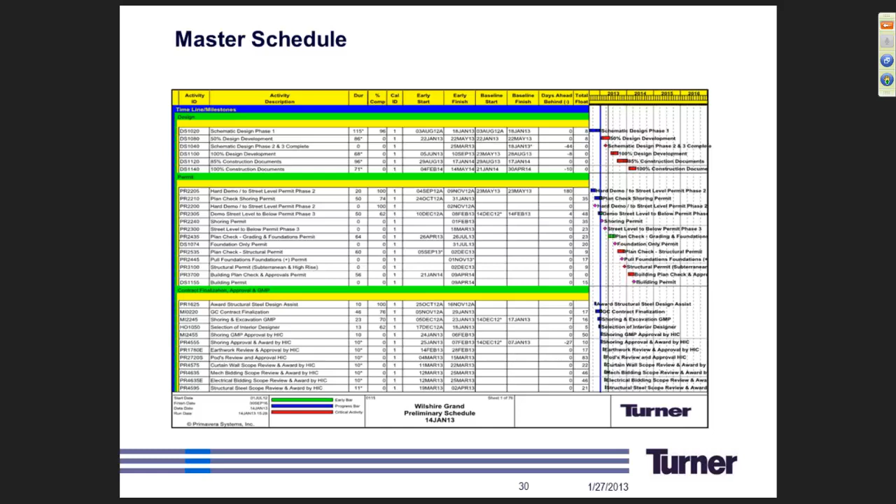So again, we start with our Gantt chart schedule, and the owner's requirement is to provide a CPM schedule. So we start with that schedule, but the next step we did, going back to our process, is to have a meeting and create a content plan. So just by what we learned on the San Diego Central Library project, we started applying it on this project right away. And instead of having just someone build a model and someone link a schedule and then have questions later, we start with the questions first, so that the outcome is the right outcome the first time around.

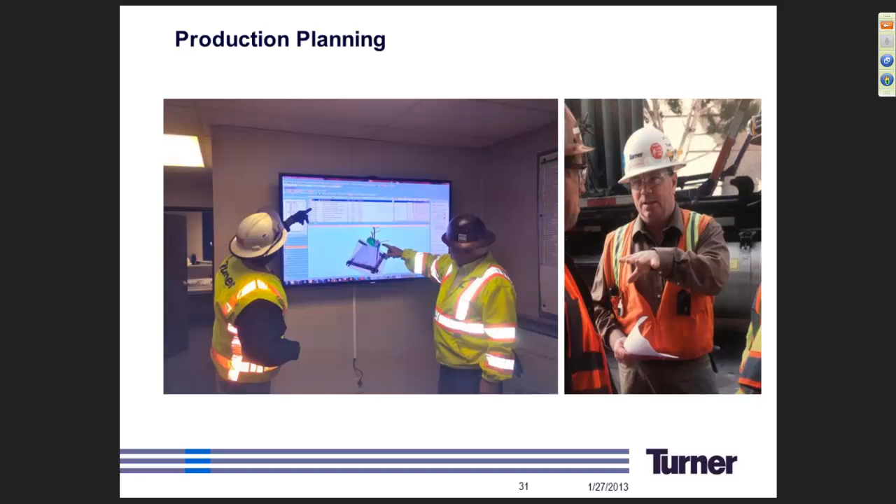And so you can see our superintendents again, Kim Long, Michael Martisano. These are the guys who are going to build this tower. So they have already figured out how they're going to build it. It's in their head. The challenge is how are we getting that information out to the masses so that everybody understands what's in Michael's head and how he envisions this tower to be built.

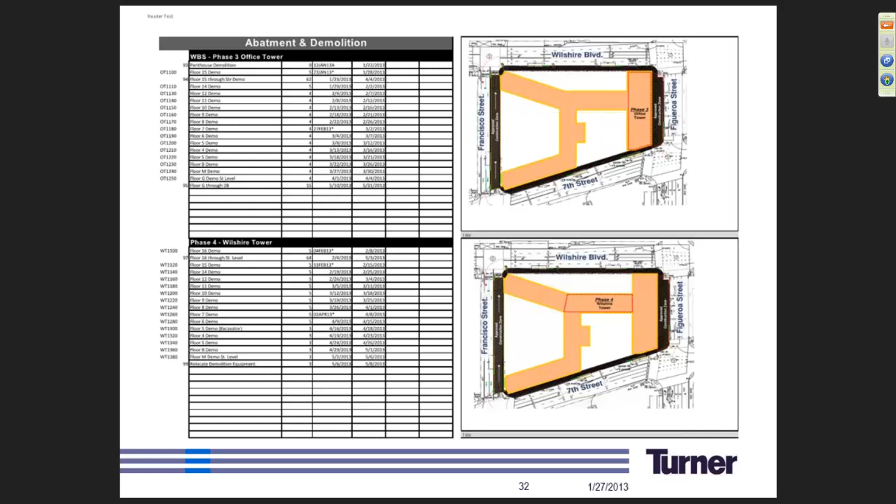So again, this is the content plan that we created. And we took basically the Gantt chart, exported into Excel. I know it's not very sophisticated, but it generated a discussion between the superintendent, our engineer, and the scheduling manager who was creating the schedule about the locations and about understanding which activities are linked to what locations, when those activities actually will happen. And we found a bunch of things in the schedule right away, even before we linked everything up, that helped us clarify the scope, helped us clarify what's going to happen when, where, just by having this conversation using this tool.

After we went through this process, then we started linking the schedule to the model. There's an existing building on site. This is the old Wilshire Grand Hotel. This was built in 1952, and it's basically coming down piece by piece. Los Angeles did not like the idea of imploding this building downtown, so we're basically demoing this building piece by piece. It was built in 1952. The entire facade is concrete, like 5-inch concrete. It's a pretty massive building. It wasn't designed to be demoed for sure. Yes, definitely.

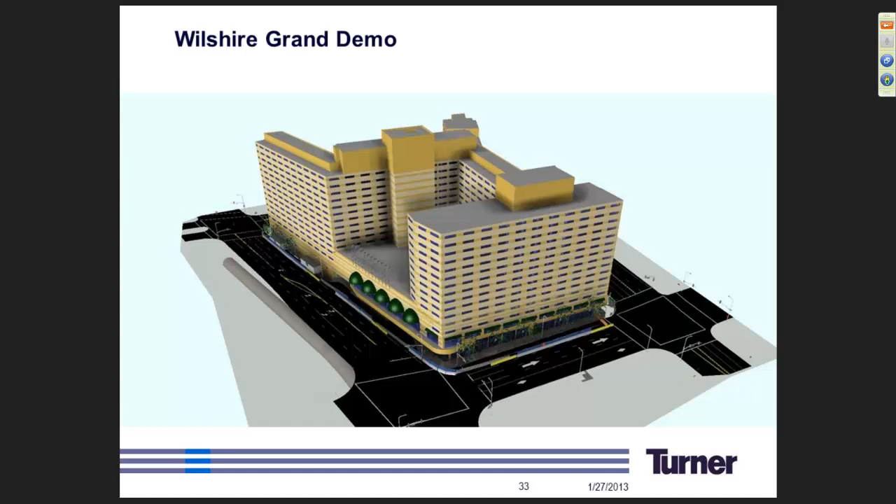So we're doing 1 year worth of demo, and we have to time the demo so that we can start building the tower. So you're going to see in a second. Basically, the tower is going to be built on this side of the property. So as we're starting our demo, and you're going to see the animation in a second. I didn't want to put in all the slides, but basically we're demoing this side first, and we're starting shoring here at the same time as we're demoing. While we're demoing here, we have to be basically down to the bottom of the grade so that we can start pouring the mat slab.

And this mat slab is, I think right now it's designed to be a 16 feet deep mat slab, and our goal is to pour it in one single pour. So it might end up the largest pour in the world, as far as we know, if we go ahead with it. So the mat slab itself has to be ready.

The other conflict and the other thing that we need to really be conscious about is these metro lines. So the underground metro lines in some areas here are just a few feet away from the edge of the property. We've got to make sure that we shore the soil next to it and make sure that there's no damage or deformation in the metro tube lines here. We have the shoring shown here. We have to coordinate that with all the underground utilities and the tiebacks, and we have to dig a hole that's deep enough for I think eight levels of parking.

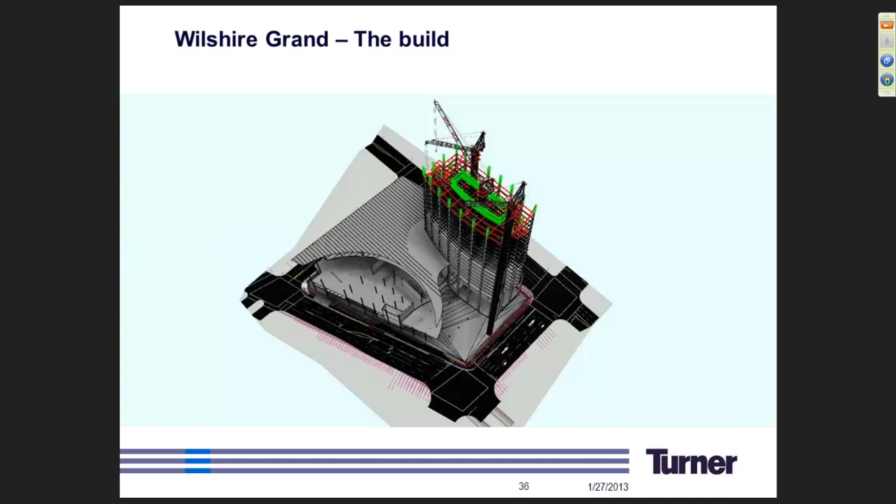So as we start coming up, we're basically going to build a podium and the core and the steel structure that follows. So what we're looking at right now is these phases of the job. Right now, we're presenting to the LA City Council and making sure that they approve of this approach.

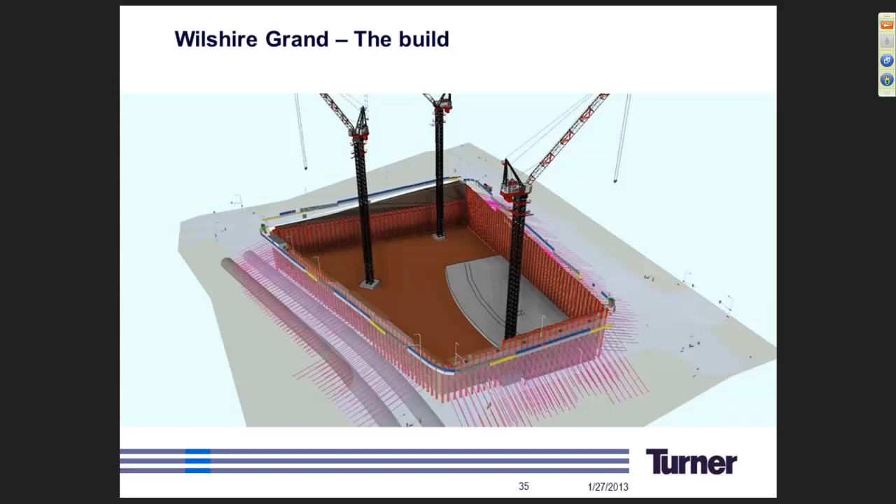So these images and this process are going to play a significant role in making sure that we have the ability to secure the foundation permit on time for us to be able to start the tower and come out of the ground. And we would not be able to do that without having a visual schedule. There's no way we could explain to city council members the complexity that will go into this process and the various risks that we need to make sure we mitigate.

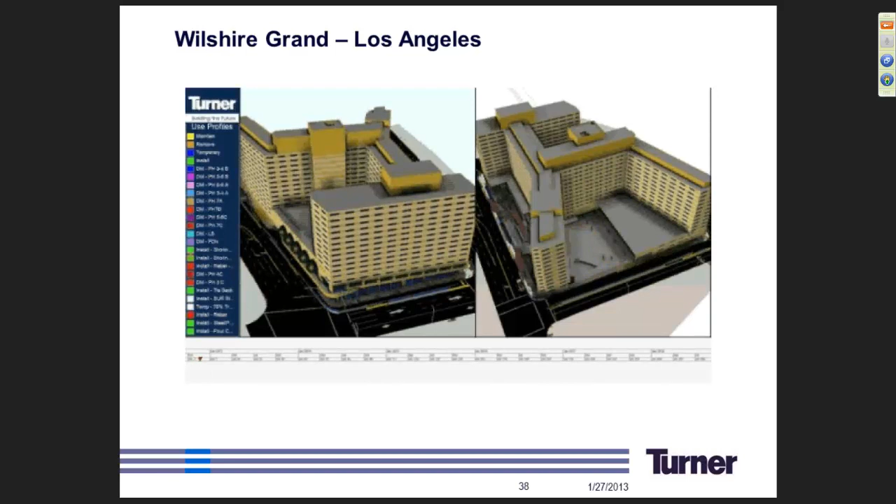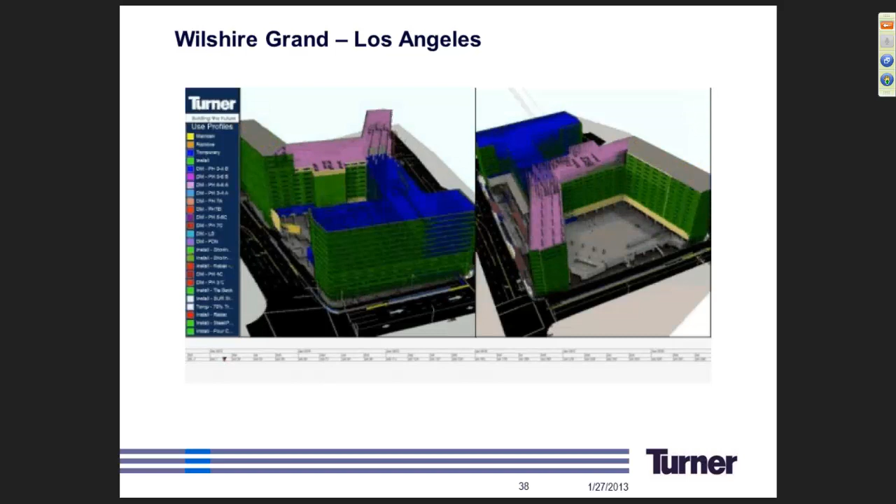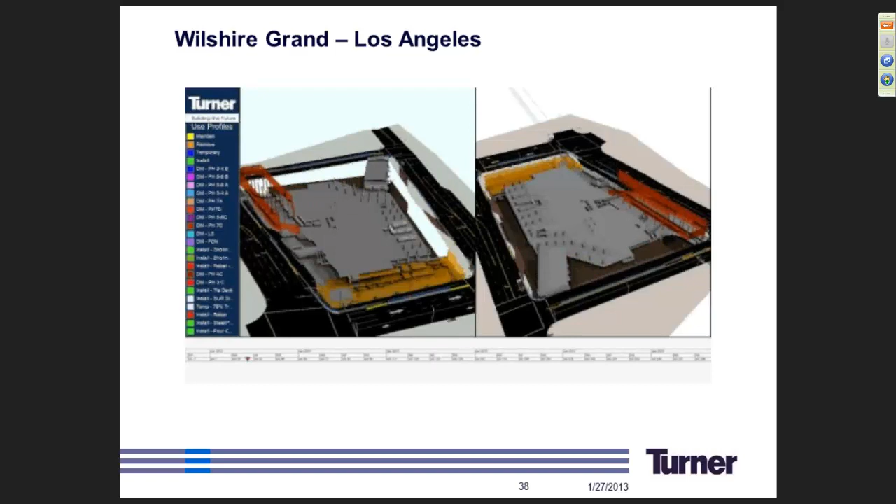And we're starting with the demo here so that we can make sure that we get down to the bottom of the hole in time for us to pour the mat slab and then get out of the ground quickly. So this is our demo. As we went through this exercise, we made sure that our schedules were published to the bidders and to our subcontractors. So when they're now coming on board for the shoring and excavation scope, they have a clear understanding of what's going to happen there.

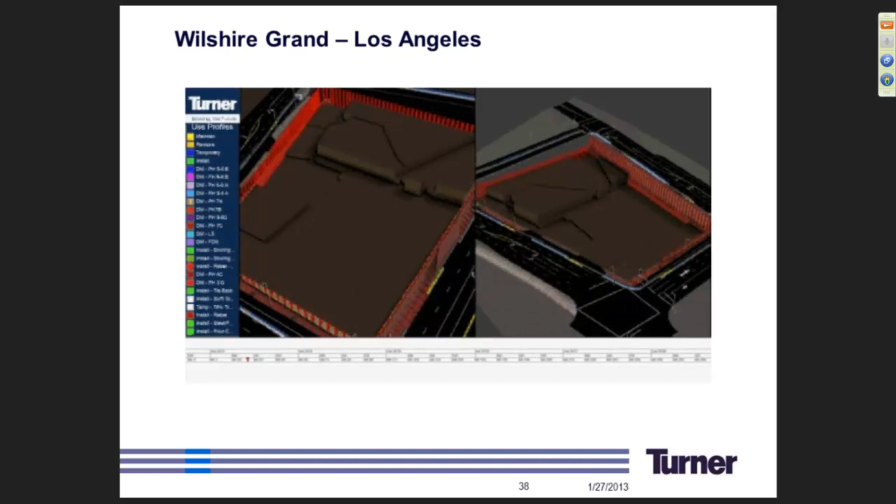This is the next phase as we go down to the hole and start excavating and shoring. So we shore across the site, and then start the excavations, go down to the bottom of the hole. As we went through this process, the site is sloping, and we immediately picked up discrepancies in the schedule that did not account for some of the slope sites.

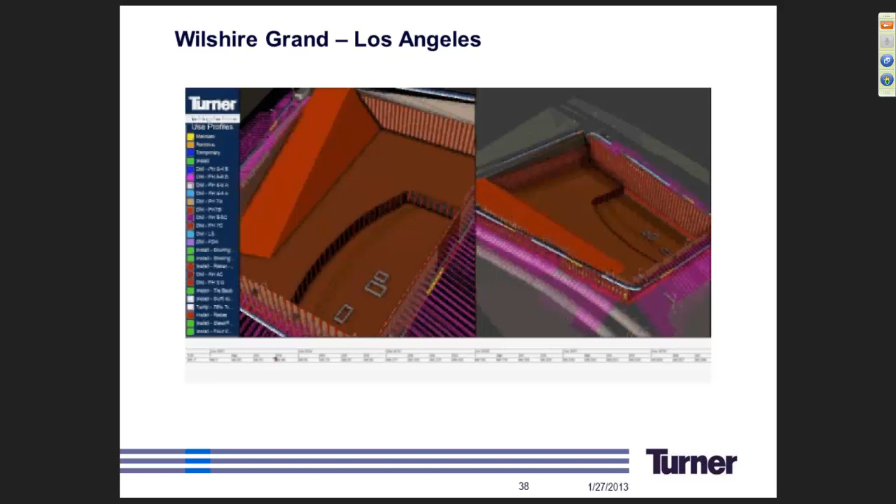So some of the activities would not have to happen in certain parts of the site, because you're out of the ground as opposed to in the ground. So you have different types of activities that need to happen there. And by using the model together with the schedule, we were able to identify those activities early on and make sure that the schedule logic was maintained. You can see the mat slab being poured and the ramp coming down to the hole. And then we start with our foundation work.

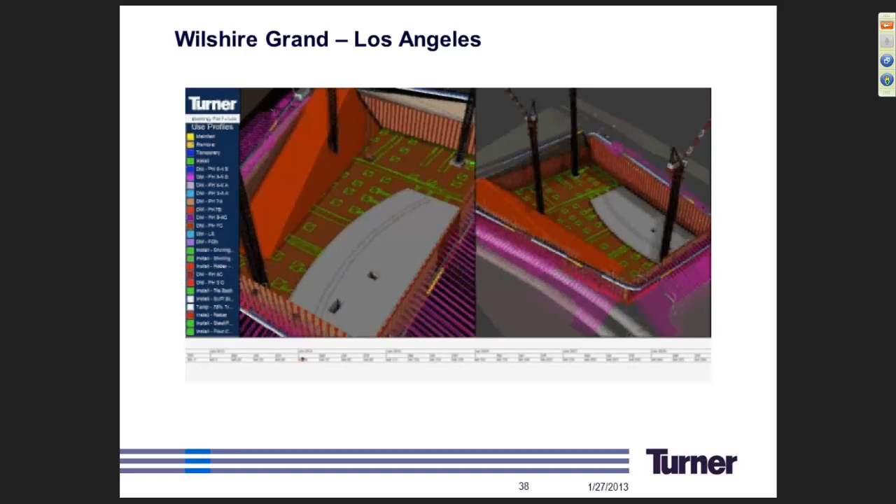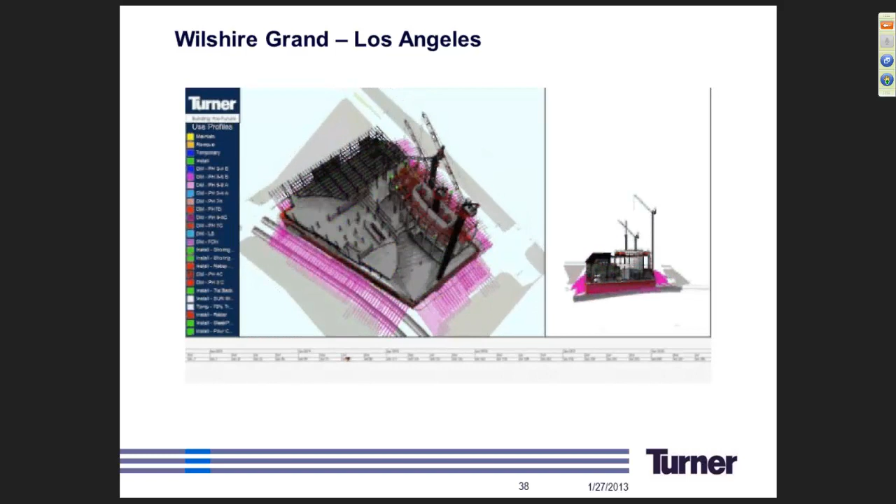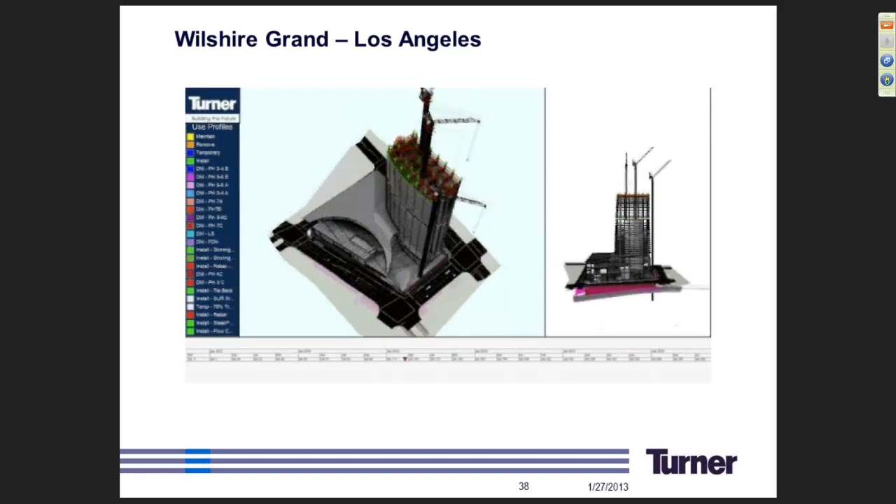And then the final phase is getting the tower built, coming out of the ground, 8 floors of parking, 4 going up, shear walls being built, the podium is erected to finish, and obviously the tower itself is still schematic, so that's something that we're going to be working on in the next year or so to make sure that we have a tower erection plan that is up to the level of detail, showing the formwork, showing the steel operations that need to go on at the same time as we erect the tower itself.

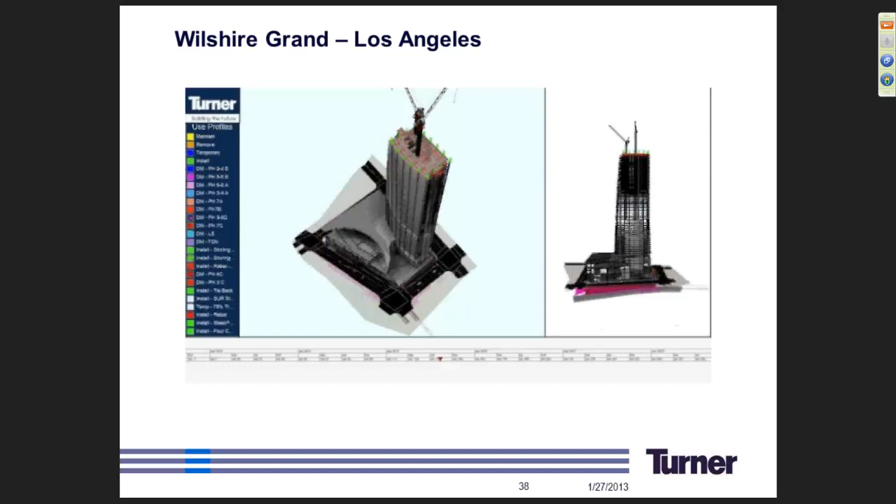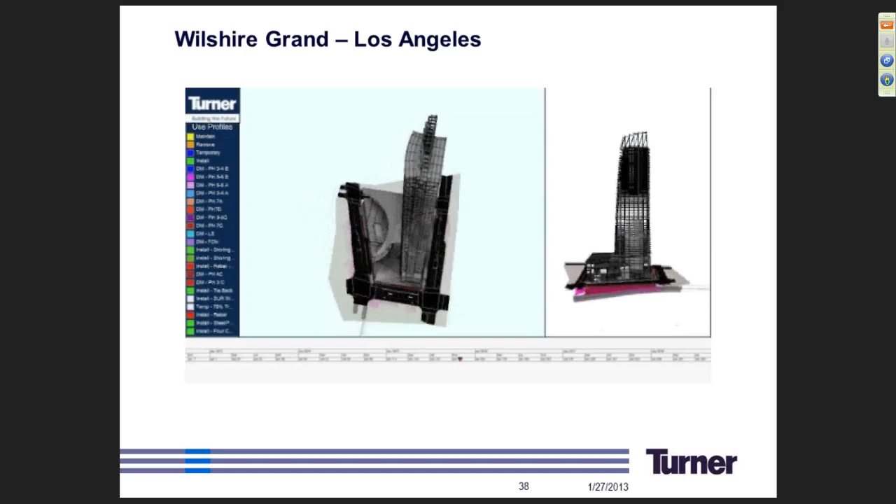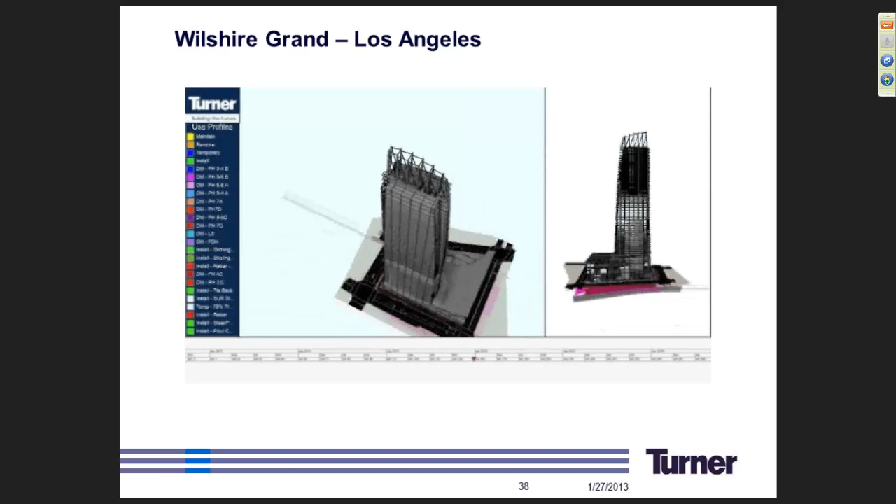So hopefully, when we're done with the project, we might be the highest tower in Los Angeles, but can't say for sure. The project itself is going to have a unique sky lobby on the top. You can see we just call it the Mohawk on the top. When guests arrive, they're going to take an express elevator up to the top, and that's where they're going to check in. So the lobby of the hotel is not going to be on the ground floor; it's going to be on the top floor of the hotel itself. And then they're going to descend to their room as opposed to go up.

So obviously some of the benefits that we experienced: production planning coordination up front, being able to communicate our plan to the city, making sure that we mitigate some of the risks, and providing clear access to material, which is going to be key when we go and build this tower. So in summary, we want to start with people, and we want to make sure that we select the right team. We understand who the participants are. And in this case, it was the superintendent, the engineer, the subcontractors.

We want to develop a process first before we implement the tool, develop best practices, understand how certain people will have to interact, set some measurable goals, and then implement the tool. And if some of the features in the tool are not automated right away, we don't get upset. We basically just want to make sure that people have the right conversation in the right meetings, even if it's as simple as just using a spreadsheet first. Then we can automate some of those processes later, because then they will understand why we're doing things as opposed to just having something that the software creates and generates.